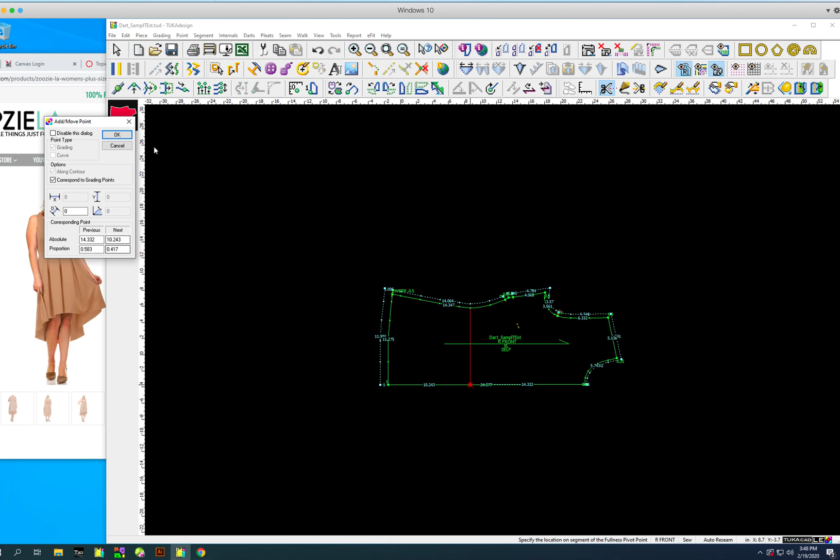This piece has grading - let's just ignore it, we'll say yes, let's cut it, and not worry about the grading. Now because we're separating these pattern pieces, it's asking if we want to add seam allowance. Sure, it's defaulting in this case to 1/2 inch - that's fine. Okay, cool, so there you are.

You got to play with your scissor tool, and practice using the keyboard shortcut for making straight lines. Now let's separate these 2 pattern pieces - they are separated, but let's actually move them. Could you guess how to move this pattern piece over to the left a little bit, so there's space between them and they're not laying on top of each other?

If you guessed the select tool, that's great. Yes, that's the tool you would use. Do you know the keyboard shortcut? Because it's kind of a pain to always have to scroll your mouse up here. The keyboard shortcut is end.

End is kind of by the number pad on these computers, sort of in the middle of the letters and the number pad. So look for end, and we'll be using it a lot, so I highly recommend learning it.

Okay, so then all I have to do is just click and drag, and it'll move. Or if you don't like clicking and dragging, you can hit the space bar and then move your mouse around. That way you don't have to hold down the clicker. Try both ways, see which way is more comfortable for you, clicking and dragging with your mouse, or hitting the space bar and having it kind of attach. I'd like you to know both ways, and then you decide which one you like better.

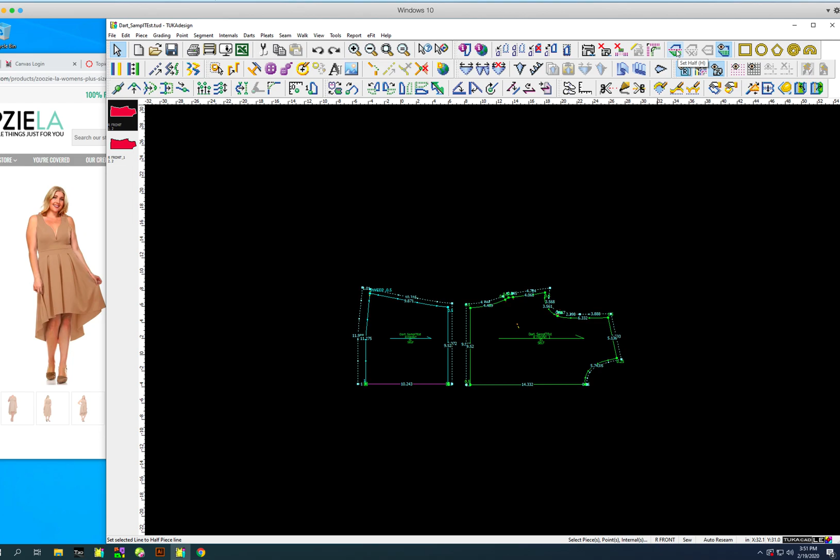So in this case, I actually want to set my fold line right now. I don't have a fold line selected. I can tell this is like my fold line toolbar here. It says view half, and when I click it, nothing happens because there is no fold line. So I have to select where I want my fold line to go. And then you can see, once I select it, this button is no longer grayed out. This is set half, so I click that.

And then now it's asking us about grading conflicts. Again, we're not worrying about grading today, so just say yes, we want to continue and ignore it. Okay, cool. So now if I hit view half, it only views half. If I click it again, it shows the whole pattern piece.

But the problem is that any changes I make, the computer's only going to let me make on the working half, and then it's going to make all of this symmetrical. So even though I set the half, it still is thinking that it's only half a pattern, and it's not going to let me select the whole thing. It's only going to let me select from here to here, it won't let me go. So like this isn't working, it's just kind of like a mirror.

So to get it to be a full pattern piece, I would say open up my half. See that red line went away? Now it's one big pattern piece. So I could make it asymmetrical if I wanted to.

And see how the other side didn't copy it? I hit Control Z to go backwards. Okay, so now it's a big working pattern piece.

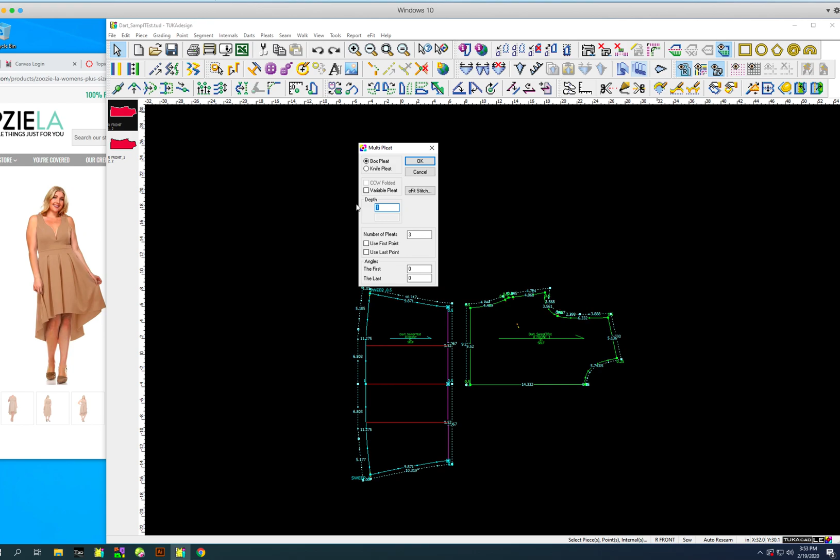So now I'm ready to get my white arrow. I'm going to hit End, and then click on this whole entire seam. Now I'm going to add my 3 pleats, so I can type in 3. You can type in how deep you want them, maybe 2 inches wide. I don't know, it doesn't matter. I chose box pleat because that's the style that's pictured here. And I'll say OK. Boom.

Look how much fabric that's going to take. This is definitely going to cost a lot more money. Okay, great. So right now, maybe I want to check and see if when I sew up this skirt, it'll still be the same length as this guy.

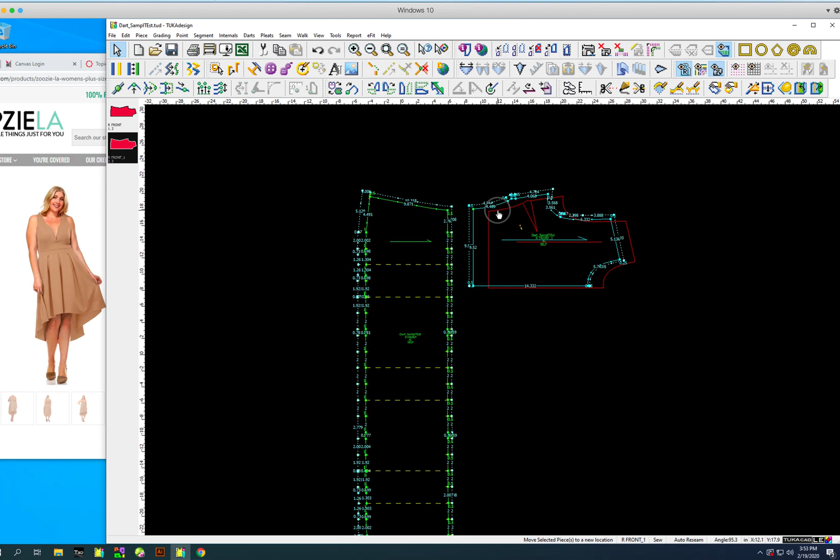So Tuka does let you fold your pleats back. It has a whole pleat menu bar. If you go up here, you can say close all pleats. Close. Oh, maybe it has to be selected. There we are. Close. Boom. And then we can see, okay, yeah, they're the same measurement on the half. So that's good to know.

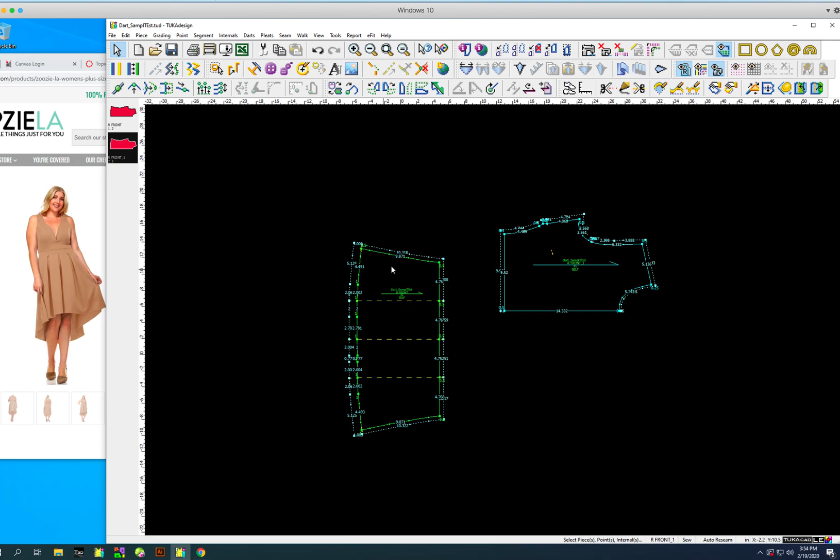Maybe we want to go back and get this guy on the half scale. Let's say we do want to change the side seam, make it longer or something. We really should only change it on one side, and it should automatically mirror the other side. So to get back in that working mode, we need to select the halfway point. So this is half of it. And then I can say set the half again. So that's our half, and then I can view it.

If I don't want to look at it, I can get rid of it altogether if I wanted. Here, I'll say view so I can see it. And I can just delete it. That's how it was originally, it didn't even have the half fold point.

Okay, so anyways, I kind of want you to play around with that. We will be using these half tools a lot. Let's see here, one thing I did want to note to you.

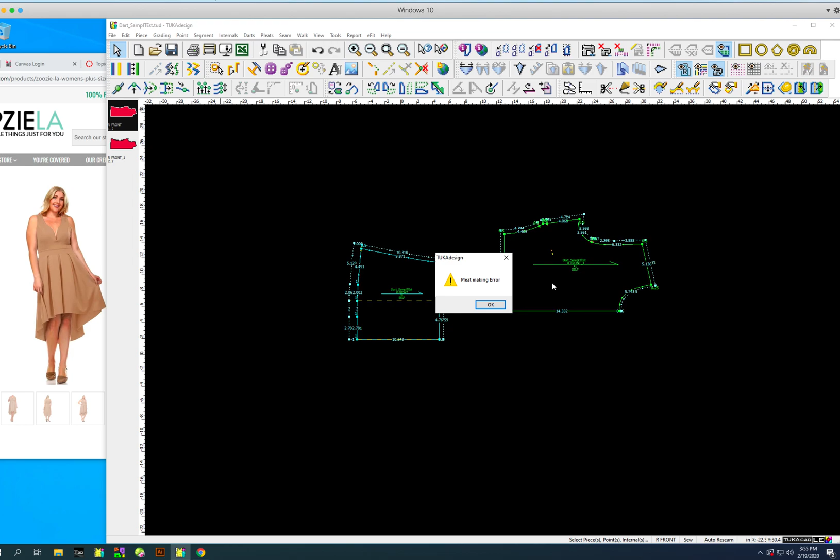You know what, let's try. I was like, did our pleat go away? Let's do pleats, open pleats. Isn't that great? Okay, so I think because we got rid of our fold line, it caused an error in the pleats. So I'm going to hit Control Z.

Okay, so right now we still have our fold line here. I'm going to go to pleats, open all pleats. Oops, maybe I need to hit Control Z again a little bit. There we go. Okay, let's try it again. Open all pleats. Yay, there it is. Okay.

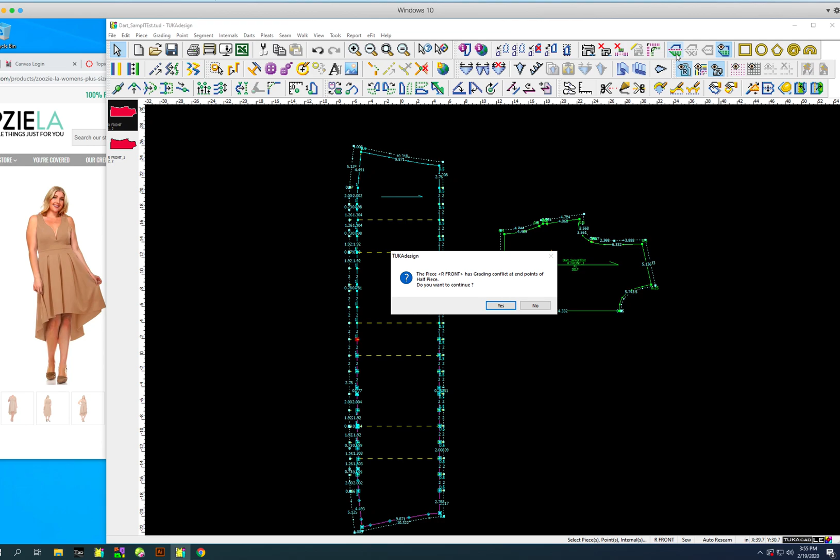Yeah, we have to be careful. So let's see here, let's have it open, and now let's set the half. Let's try that. Okay, now we can set our half. Ignore the grading business, we don't care today. And then now let's — I don't think we should delete the half because then it's going to mess up our pleat tool. So if we don't want to look at it, let's just not look at it. But we should still leave it because we have the pleats there and we want that guy to be symmetrical.

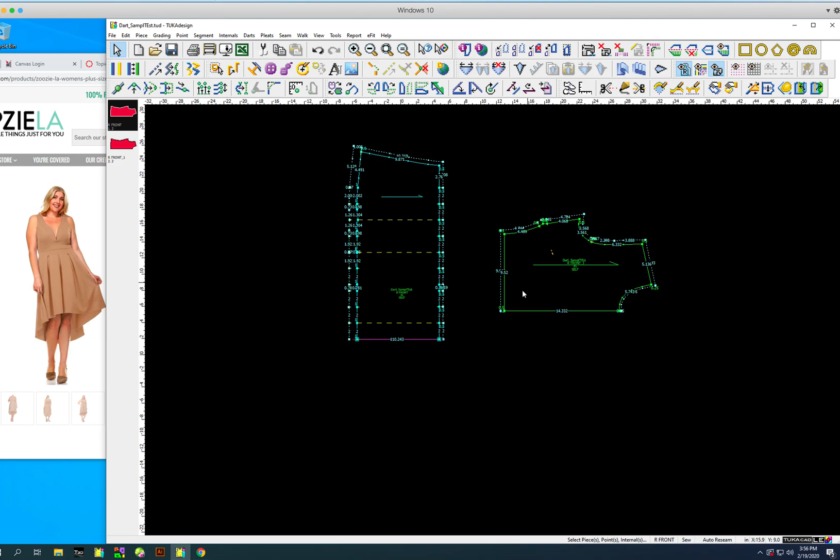So at this point when you're working with the pleats tool, you kind of have to leave it with a folded line, you can't get rid of it. But you don't have to look at it if you don't want to, so that's the good part. Let's go back to pleats and close them. There we go, so now it's letting us look at it closed.

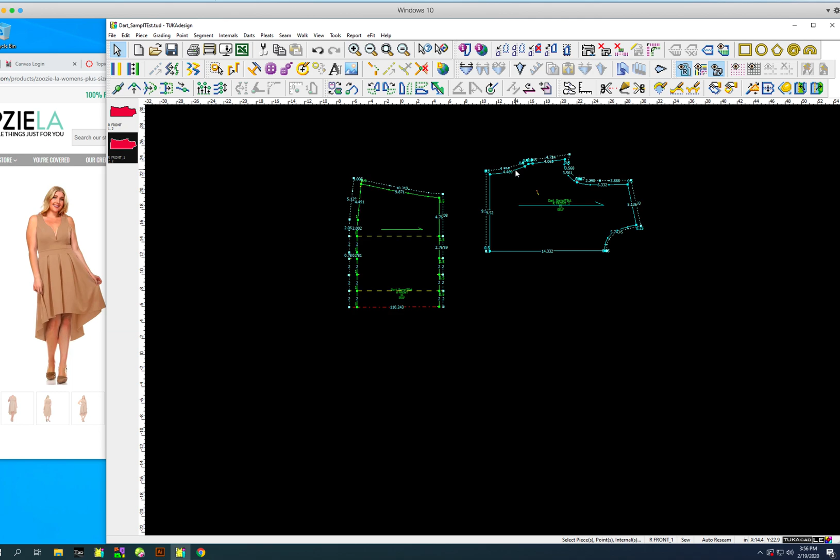Okay, let's see here. So anyways, that's really the end of this tutorial. I hope you're starting to get a little bit more confident in moving the pieces around. And yeah, let's just see how this assignment goes.